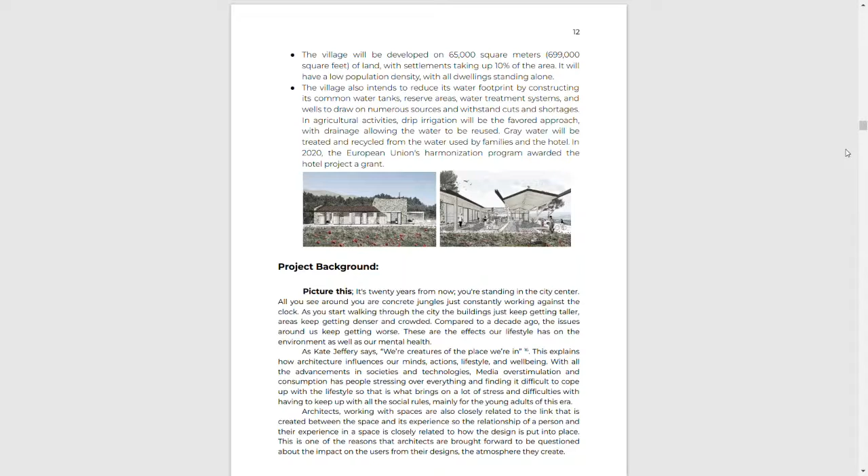So architects working with spaces should be working towards an idea of having fully sustainable and green designs. The atmosphere that we create from our designs has a huge impact on the users. That is why I think architects should be brought forward to be questioned about the reasoning of their designs and the conclusions of what they think should be done with these spaces.

Talking about the project statement, nature detachment is a common result of these multitudes of stressors of life that need to be guided. This project brings forth the questions of the link between design and nature, and also looks deep into how architects are able to have a huge impact on society, and if certain design elements or typologies can act as an aid through the set of design tools set in place based on research. The limitations can vary from the requirements to the monotonous behavior of daily lives.

The project statement talks about nature detachment and how it is a common result of these multitudes of stressors of life that need to be guided. The project brings forth the questions of the link between design and nature, and also looks deep into how architects are able to have a huge impact on society, and if certain design elements or typologies can act as an aid through the set of design tools set in place based on research, and how we can go about it with different requirements needed for the city.

Talking about green buildings and the environments they create, human comfort is something that we need to fully depend on, to see how users use those spaces and how they feel comfortable in it, and also to understand how architecture plays a huge role in this since we reflect the surroundings we are in. These are people using these spaces in their daily lives on average, and talking about its context, and however to give back to society as a positive result and not cause any harm, to use as few resources as we can in construction, and to also have zero waste depending on the building itself, trying to change as much as we can in our own actions of design and in the implementation of design to have a better impact on our society.

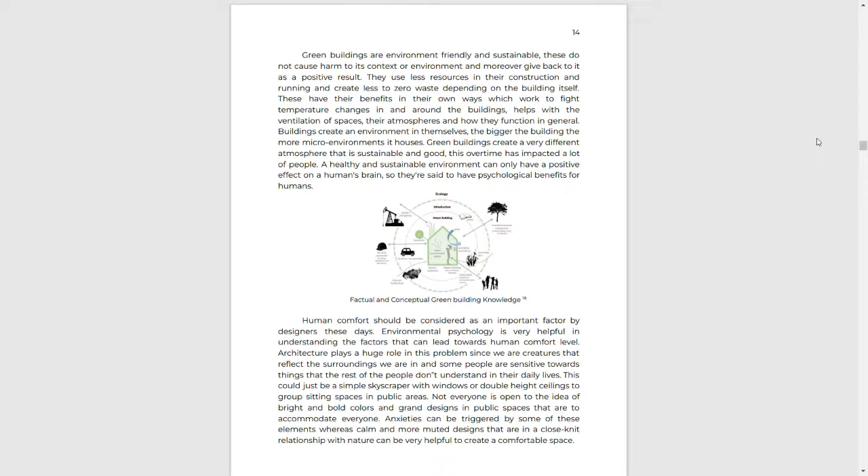This is an image that talks about factual and conceptual green building knowledge, which talks about adding in a few elements, whereas subtracting a few elements that could be the ones causing pollution, so cars and different mechanisms and technologies that we use in construction, as well as the people living there, and to add different things that can help our nature, like plants and trees, and different energy management systems that can help our environment and make our atmosphere a better place for people to live in.

Talking forward is precedent studies, where I compare four projects with each other to see the different aims and objectives they have and different concepts they have around the world.

The first one we talk about is the Regen Villages, which is currently a hypothetical concept, to be designed post-2022. The idea is on 100,000 to 300,000 square feet, and is done by EFFEKT Architects. The concept is that it is a visionary and regenerative model for engineering and facilitating the development of off-grid, integrated and resilient neighborhoods that power and feed self-resilient families around the world. The objectives were to improve the quality of life of residents by encouraging more social interaction and meaningful experiences with each other, and also to have a relationship with nature and the architecture surrounding it, as well as to be a holistically sustainable, self-sufficient area and environment where people could live together in cluster homes surrounded by landscape, with a quality of life much better than what is seen in cities.

Then talking about the second one, which is the Sirius Community, it is in Massachusetts, United States, and it is about 120 people, started around 1978.

It is a non-profit educational center and spiritual community that aims to live by their values and provide education to other people so they can also live in the same lifestyle. Their spiritual foundation reflects awareness of an underlying presence uniting all things in their society, in regards to people living there individually and collectively, finding a place where they're spiritually self-centered and purely awoken, feeling grateful for the life they have in those outskirts of the city rather than in a metropolitan area.

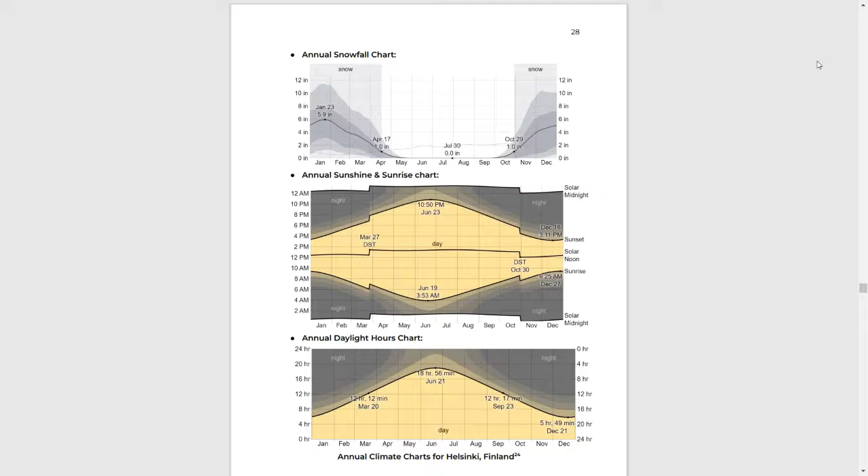Annual daylight hours we get in Helsinki are about 12 hours in early spring, 18 hours in midsummer, 12 hours in early fall, and 5 hours and 49 minutes in early winter.

Talking about accessibility to the site, I cover the distances from different locations in Helsinki for people trying to reach the site. First, the Helsinki-Vantaa Airport, about 20 minutes away by car and 45 minutes by public transport. The Malmi Airport in Helsinki is about 30 minutes by driving and 47 minutes by public transport. The Helsinki city center itself is about 25 minutes by car and 26 minutes by bus, which takes people directly from the city center to the area of Viikinranta.

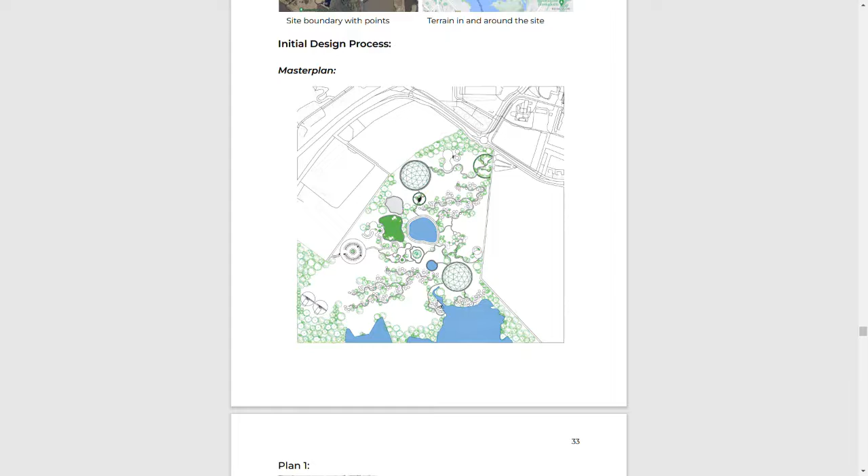Having these water bodies existing on site helps a lot in planning the areas. Moving forward, the main plans I did were for the administration building, which is the main entrance and clinic area.

This is the first aid clinic on site, the main offices, the reception area with sitting areas, as well as the healing center and the workshops present inside for people to work in and receive the therapy they need.

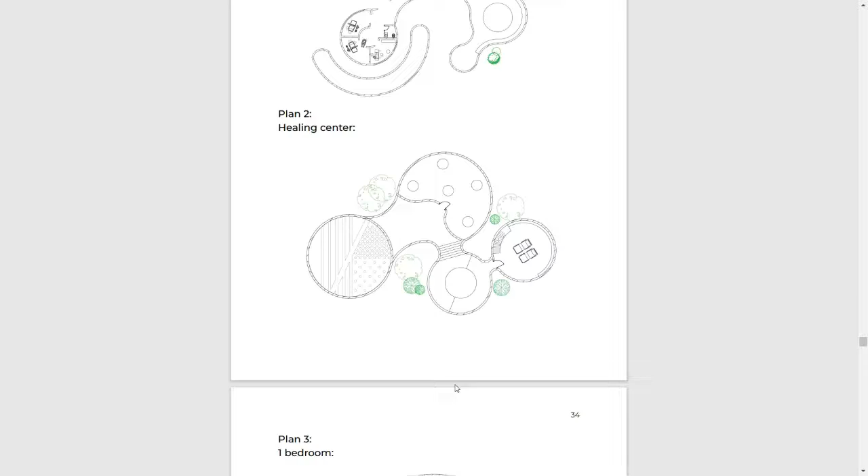Lastly, this is one of the bedrooms in the apartments, which were designed based on the amount of people there are.

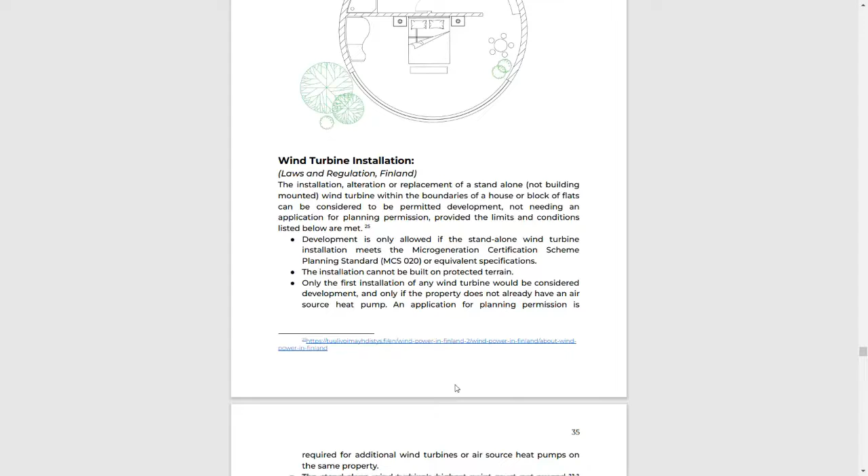Talking about green design, sustainability, and ecological design, I cover the wind turbine installation inside the project, which aims to run with wind turbines and use the energy they produce.

Looking at the installation of wind turbines under the laws and regulations formed by Finland, the installation, alteration, or replacement of a standalone wind turbine within the boundaries of a house or block of flats can be considered permitted development.

This means it would not need an application for planning permission, provided the limits and conditions listed are met. They provided a list of different requirements needed on site based on which wind turbines would be allowed on a project.

Some requirements are based on the distances between ground level and the turbine blades, which is about 5 meters between the blades, and from the ground it has to be 11.1 meters, marking the highest point of the wind turbine itself.

There should also be about 400 feet of distance without any building higher than 2 floors that could act as a hurdle between the wind and the turbines catching it to generate wind energy.

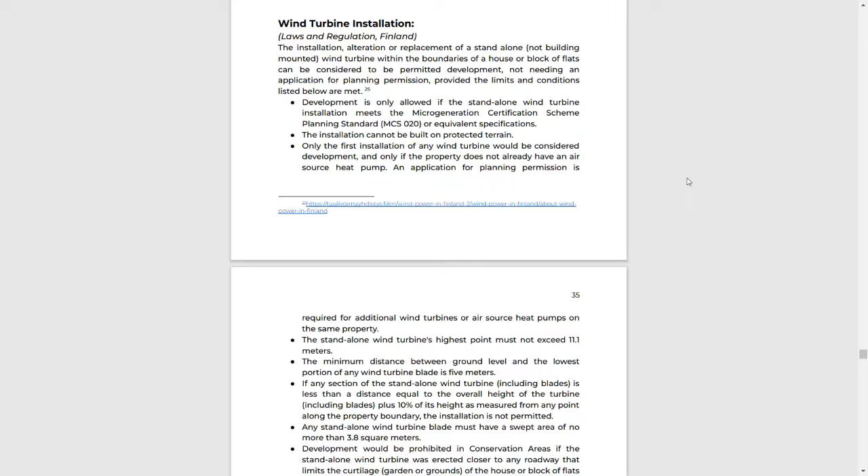Talking about the materials of the wind turbines, they should use non-reflective materials. Finland, being a rather strong and powerful country, has the ability to significantly boost its wind power capacity over the next few years.

The goal for the wind power industry is to produce at least 30 TWh of yearly wind power in Finland by 2030, amounting to roughly 30% of the country's electricity consumption at that time, an increase from 7% to 30% over the next 10 years.

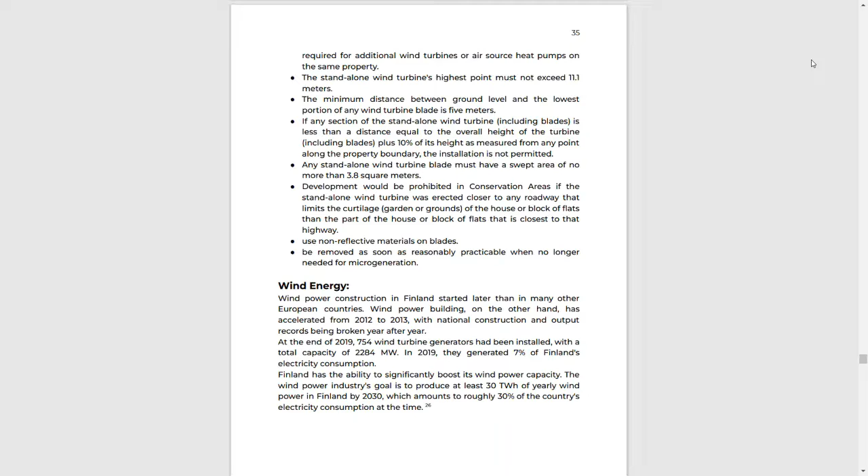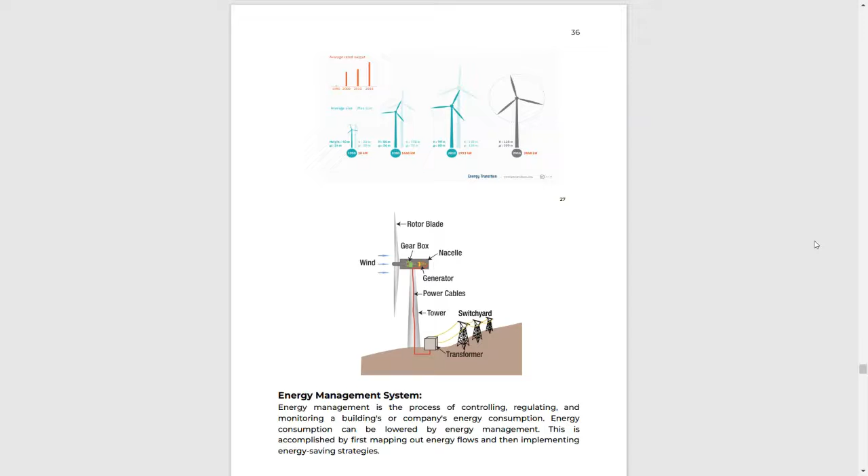Then I talk about an energy management system, which is the process of controlling, regulating, and monitoring a building's or company's energy consumption. It can be lowered by energy management. They can be a lot more energy efficient if they try different techniques that save energy, reuse and reduce a lot of the wastage we're taking from the energy, whether it's electrical or any other sort of energy being used around the building, and it can be mapped out around the site to equally divide the reuse and reduce of the energy itself.

Companies spend a significant amount of money on energy, and these percentages have risen over the years based on the amount of money, labor, materials, and everything spent on that project itself. The energy management system provides them with a better option and a more sustainable way of running their project.

Then talking about the ecological design details in the project itself, there is the grey water system where water is treated through a device of filtration and can be reused in different parts of the project itself.

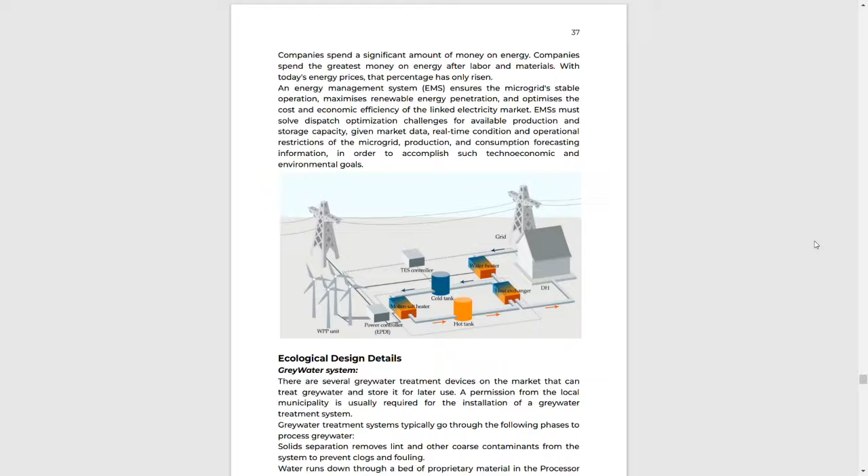Grey water treatment systems typically go through the following phases of processed grey water. The solids are separated from the water, and then it removes the lint and other coarse contaminants from the system to prevent clogs and fouling. This is done through coarse filtration with sand and rocks, and then later it is passed through proper filtration.

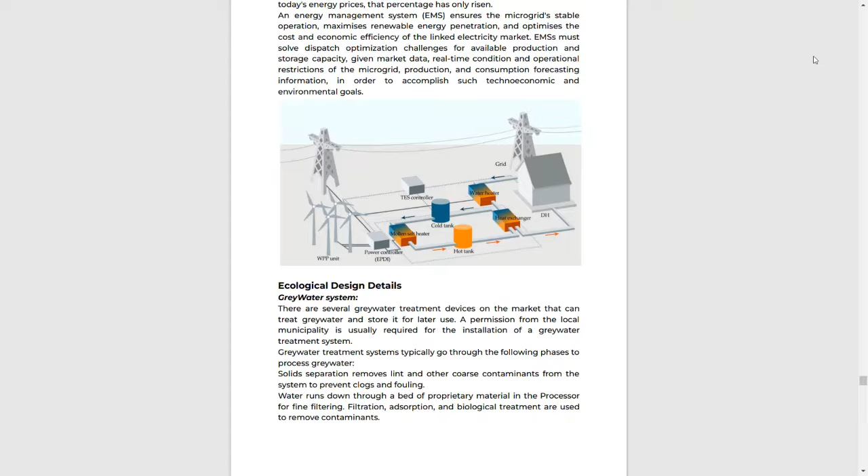Once the coarse filtration is done, the water is processed through finer filters that remove all of the impurities in the water, running down a bed of proprietary material in the processor for fine filtering. Filtration, adsorption, and biological treatment are used to remove contaminants from the water so it is completely ready to be used.

But before it is reused around the site, it is disinfected through UV rays, and this purified water is then stored for recycling. Ultraviolet disinfection completes the treatment process.

After the treatment, the water can be saved for flushing toilets, gardening, or doing laundry. These are the kind of different activities that do not require completely clean water. Most plants can benefit from grey water.

Soaps and detergents are likely to be present in the water from our shower, bath, or laundry. These contain salts as well as phosphorus and nitrogen nutrients. By immediately reusing grey water in the garden, we are adding essential nutrients to the soil, since plants need phosphorus and nitrogen, which are some materials commonly used in fertilizers.

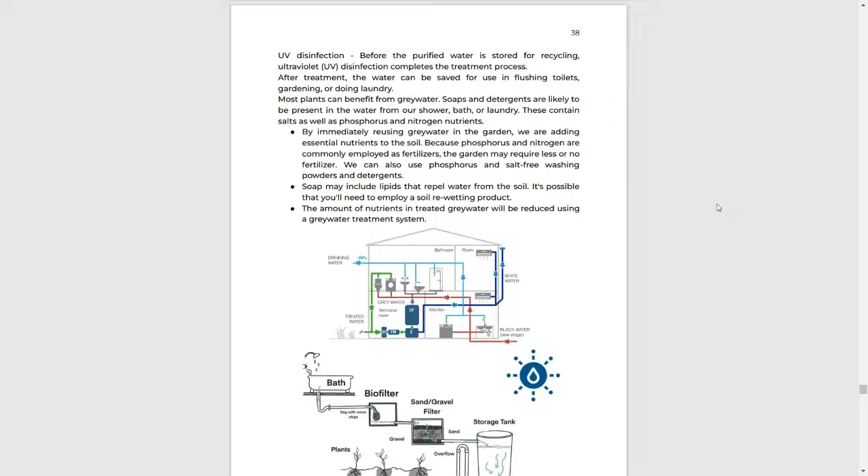So following are some of the images that show the diagrams for the grey water system. Getting all of the water from different parts of the house and building, coming from the drinking water we're using, or any water used inside electronics, known as white water, and then the treated water going towards these buildings is all in a cycle.

The black water is considered the sewage water that leaves the house without being filtered, since that is completely not okay for it to be used. And then the grey water can return back to all of the activities where drinking water is not necessarily used.

In the image below, it shows that the water from the bath can then be biofiltered and sent through a sand and gravel filter, and then sent to a storage tank. Since it's after the filtration, it's completely clean for use in plants, and it can later be pushed through irrigation pipes towards the plants outside in the vegetation area.

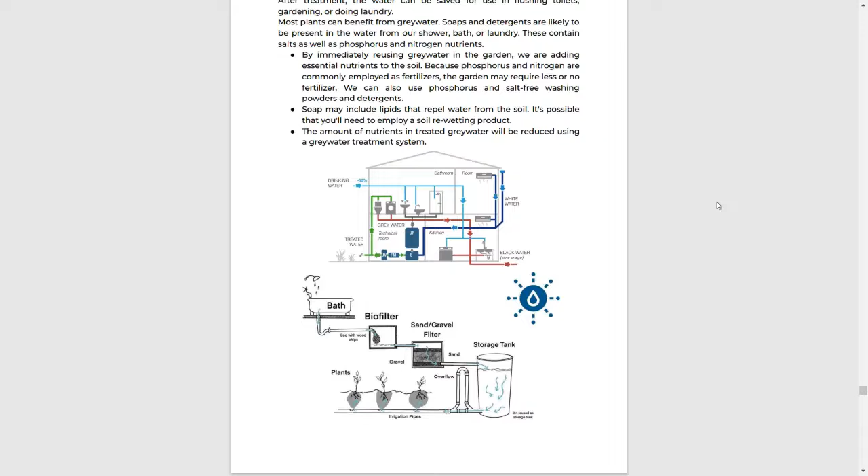Then coming to green facade, this is one of those techniques that can help us in energy efficiency, and a lot of sustainable methods are coming through green facades. It is a very sustainable technique and a sustainable way of designing any building and any of the walls or facades that we have in our design.

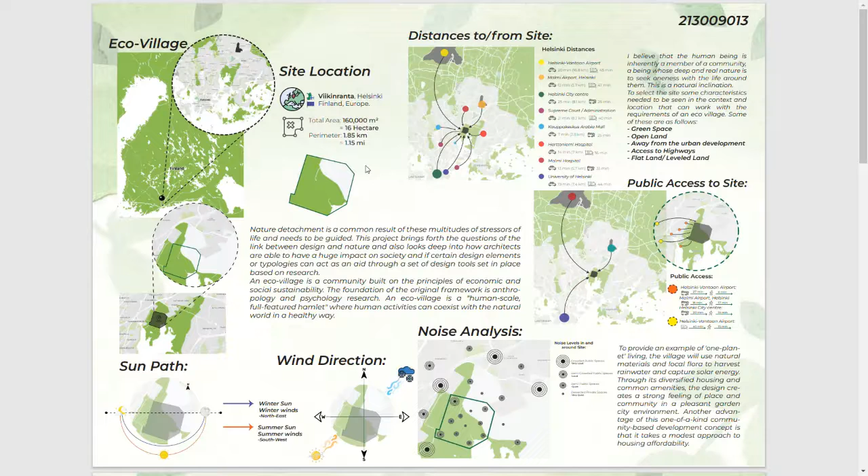Continuing on to the design part of the project, as we know about the site, the measurements, and the site analysis already, I talked about the general idea of the site and the project itself and the one planet living concept, and then how the site needs to use the materials present on and around the site as the construction materials for the eco village project.

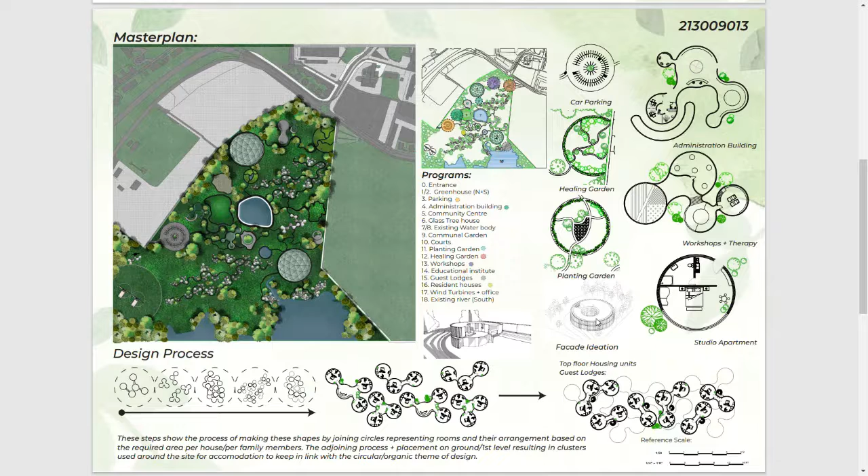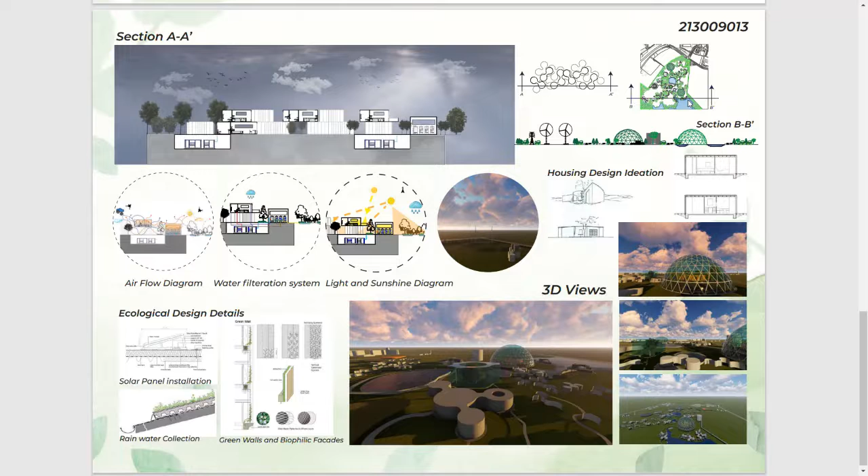This diagram basically shows the main section of the housing clusters that are placed in one of the areas of the site. So this is the cluster that is present on this part of the site, which is the guest lodges. And this part of the diagram shows the gradient between the cold and the hot wind.

So the hot air rises in the room, so it would rise and it would leave through the windows or the skylights that are present in the rooms, as well as the cold air would settle down inside the room, and then all of them would lead from the right to going towards the left for the summer winds, and then for the winter winds it would be from the left to the right, and that is how they would work throughout and around the site.

Then in the second diagram showing basically the water filtration plant, the water that is being used from the washrooms is then first sent for coarse filtration, then it is sent for fine filtration, then it is sent to the filtration plant where the water is completely disinfected of any contaminants, and then it is used in the plantation, as well as the rainwater catchment system that is then finally filtered before selling into the filter plant, and then all of the different aspects of water plants that there are.

Which is then moves to the second part of the diagram, which is the light and sunshine diagram based on the windows that are placed in the different directions of the site. So this is the summer sun, this is the winter sun. So winter sun is a lot more diagonally straight than compared to the summer sun. So talking about the summer sun, it would go directly above the bedrooms, and it would stay more so in the front part of it, whereas the winter sun would be a lot more straighter and would give less sunlight inside the room and would be a lot more outer.

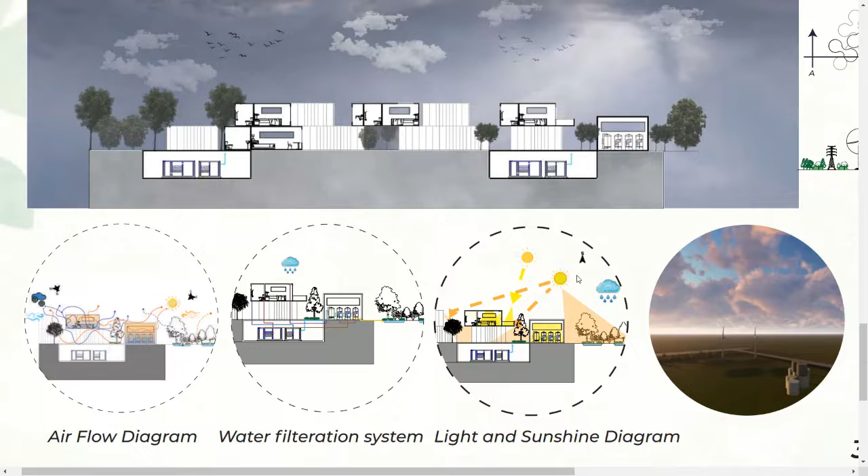On the right is the section line for the second section, the site section, which shows both wind turbines present on site, the two greenhouses, the water bodies that are part of the river, and the boundaries of the site itself, the energy plant, the tower, as well as the houses, the guest lodges, and the tree house on site.

The housing design ideation shows the different levels of houses, since it's a one-story house design and they would be placed on top of each other. These are the sections showing the insides of the house, how it would be with a few rooms.

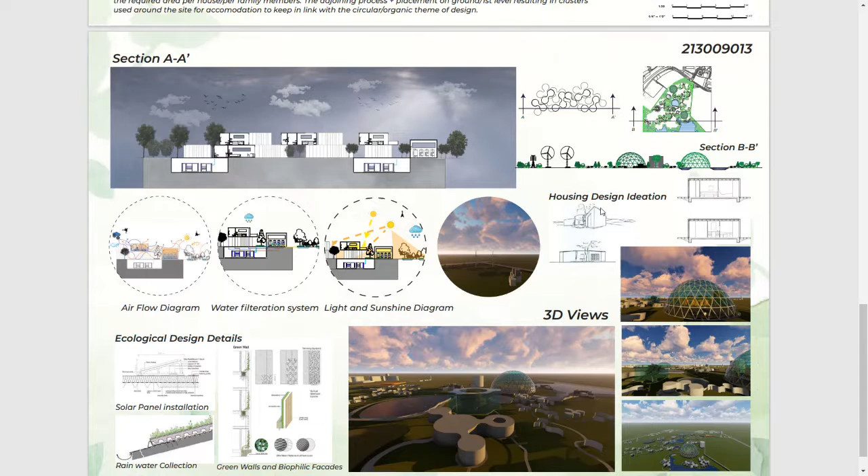Some of the more ecological detailed designs are the solar panel installation with all the elements it requires, as well as the rainwater collection placed on all of the buildings on the edges. Lastly, the green walls and biophilic facades, as we talked about before, require elements like the mesh, plantation, and irrigation panel to get stuck onto the wall.

Lastly, the 3D views of the model of the site and the project, with the main administration building, the treehouse building with the tree in the middle, and the greenhouse with the water body right next to it.

The site is relatively emptier on the sides, so it shows a lot of the outside views, the houses placement, the plantation inside the greenhouse, the vegetation areas, and lastly a general bird's eye view of the site with all of the functions placed around.

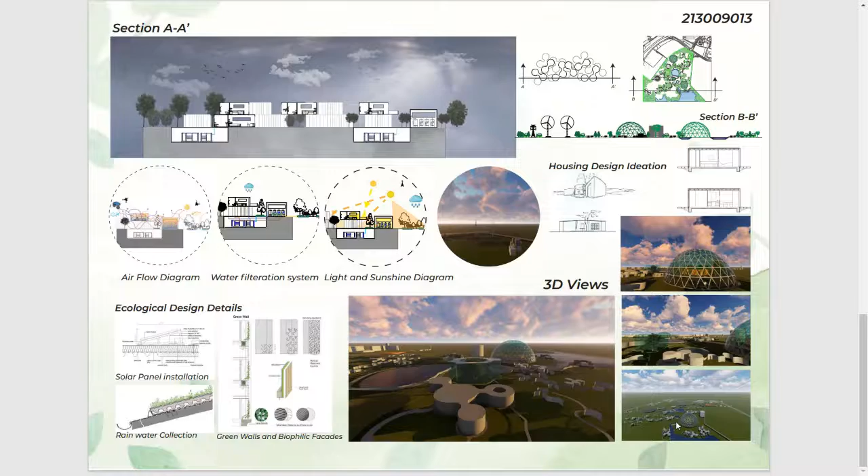Coming back to the report with the conclusion of the project development, it goes through the timeline starting with ideation, through site analysis, and then the design initial and final stages. The project was developed in steps based on the requirement and understanding of the concept of eco-villages, their needs, and ways to design something better than what we've seen in the past.

Some of the key points of the design are as follows: it is supposed to be designed as an eco-village that maintains a way of life smoothly integrated into the natural world by combining all the characteristics of an eco-village.

To select the site, some characteristics needed to be seen in the context of the location, which were green spaces, open land outside urban development, access to highways, and flat land.

The site was located in the outskirts of Helsinki, Finland, with a total area of 16 hectares and an approximate perimeter of 1.15 miles. The site is 16 kilometers away from Helsinki Airport and can be accessed by bus or metro from the airport. The city center is 8.1 kilometers, or 25 minutes, away.

The project aims to cater to 275 to 300 people in the community, with a built space area of 17,652 square meters, rounding up to about 1.8 hectares, which is about 11.25% built area to 88.75% unbuilt or green area ratio.

There is one main access to the site through the tertiary road on the western side. Since the main road is always busy and not practical for an entrance on that side, the project was created with environmental and ecological considerations.

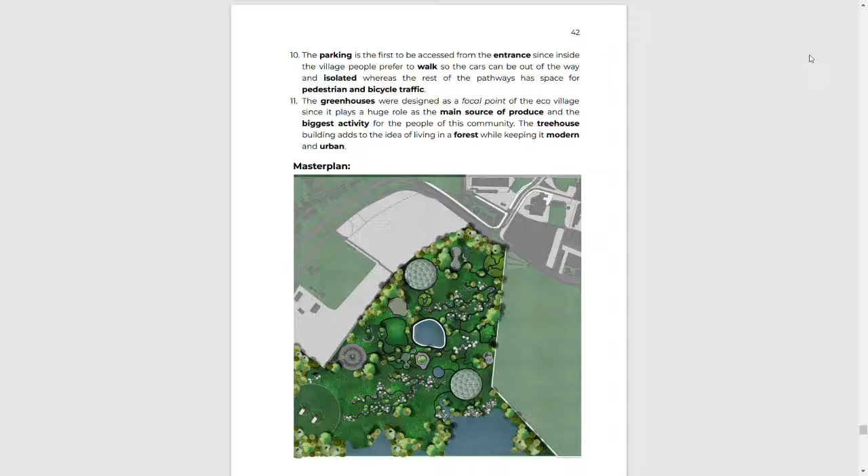Below is the master plan again showing all of the programs, and lastly it has the section and the references that all of the data for the report has been taken from.